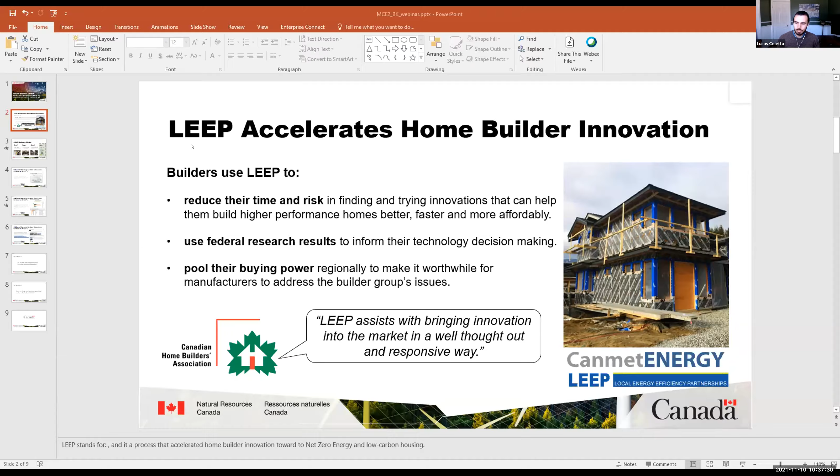And yeah, my name is Lucas Coletta. I'm here from NRCan. I work with the LEEP team, and I'm just going to take a few moments of everyone's time at the beginning of this presentation to talk a little bit about the material carbon emissions estimator that NRCan has partnered with Chris and the Builders for Climate Action to develop and to raise awareness around embodied carbon in materials that are being used in the construction industry today, and what we have to look forward to in the future.

So LEEP, as Steph mentions, stands for Local Energy Efficiency Partnership, and it is essentially a process that accelerates home builders' innovation toward net zero and low carbon projects and construction for housing. And historically, builders have been quite responsive throughout the process. I think they found a lot of value in the information that gets shared, the way networks and connections are formed, and ultimately coming out of the process with a better understanding of how to take on more energy efficient or more progressive projects in that sense.

And so builders have used LEEP to reduce both their time and risk. They've also used it to take federal research results and inform some of that decision making. And some of that is both on energy conservation measures, as well as best practices towards resiliency, durability, and what we're talking about here today, embodied carbon. And alternatively, they also pool their buying power. So regionally, builders come together and are able to identify technologies that their specific market would like to take on and adopt, and find ways of bringing that to their marketplace in a cost-effective way.

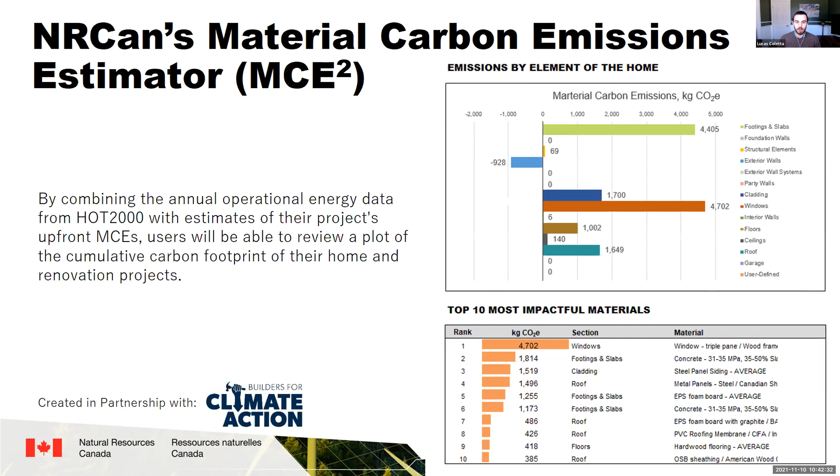So the NRCan Material Carbon Emission Estimator is going to be available in late November to early December. It'll be published on the LEEP website. And if you have any questions about that, or want to learn more about the LEEP carbon calculator, feel free to reach out to either Chris or myself or Steph, and we'd be more than happy to provide you with the information that you're looking for.

So I think with that, I'm going to wrap it up, and we have a couple of poll questions here that we'd like to get everyone's feedback on, just as we roll into this presentation from Chris. So the first one is: is low carbon desirable to home buyers?

We got a quick question in the chat while we get these results here. Is this similar to the EC3 embodied carbon calculator, or how is it different? Maybe I'll let Chris answer that. Chris, are you familiar with the EC3 calculator? Yeah, I am, and I'll address that maybe in more depth, because I'm going to go through the tool and how it works and what it's for.

But it's pulling from the same kind of pool of data, but this one is specifically designed for low-rise residential construction, and is made to model particular buildings, whereas EC3 is more of a database where you can find the source emissions for all of the materials, but it doesn't help you with the calculations to figure out what the impact of that would be for your particular building. So the MCE squared tool takes that step out and makes it easier for somebody specifically in the low-rise residential field to be able to use that information.

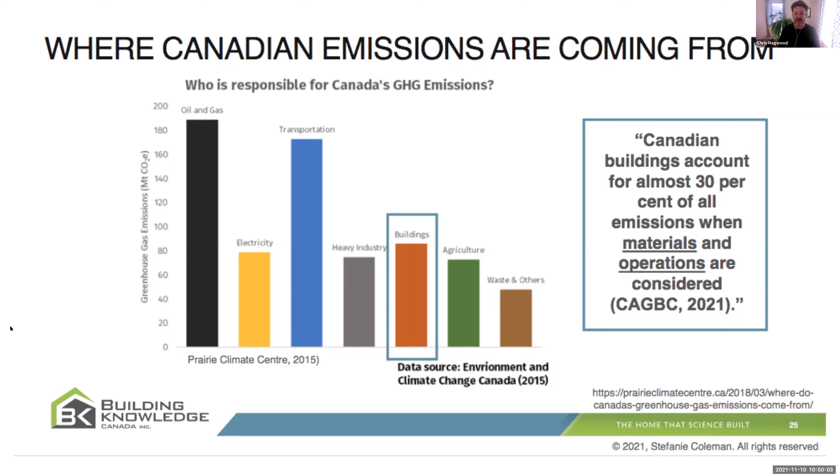So anybody who was at the previous session that Steph presented at has seen this graph, or you might have seen something like this somewhere. This is specifically for Canada, but buildings represent about 30% of emissions. And we want to make sure that we're not just counting operational emissions in that take, but that we're figuring out where building materials show up in lots of these other categories.

So obviously, it's fairly easy to measure both energy use and then emissions from operating buildings. But the manufacturing of the materials is buried in a lot of these other categories. Some of the oil and gas that's extracted is for building materials. The electricity is used for that. Transportation is used for building materials. And that heavy industry bar includes the manufacturing of a lot of materials.

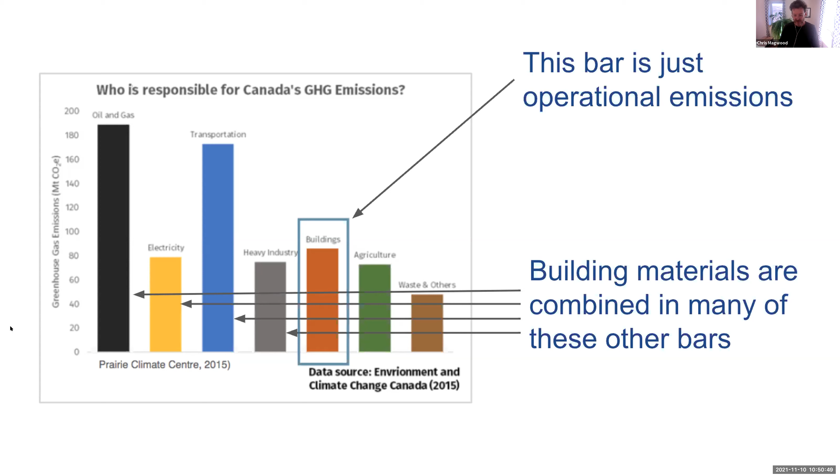So we're thinking now more about the full life cycle of our buildings, and that's where this whole notion of embodied carbon as distinct from operational carbon comes in. And you may have seen various versions of this life cycle graph where something starts as raw material, gets transported to a factory, is made at the factory, gets transported to a job site, is put into a building. That's the upfront embodied carbon. So those parts of the life cycle involved in making the building.

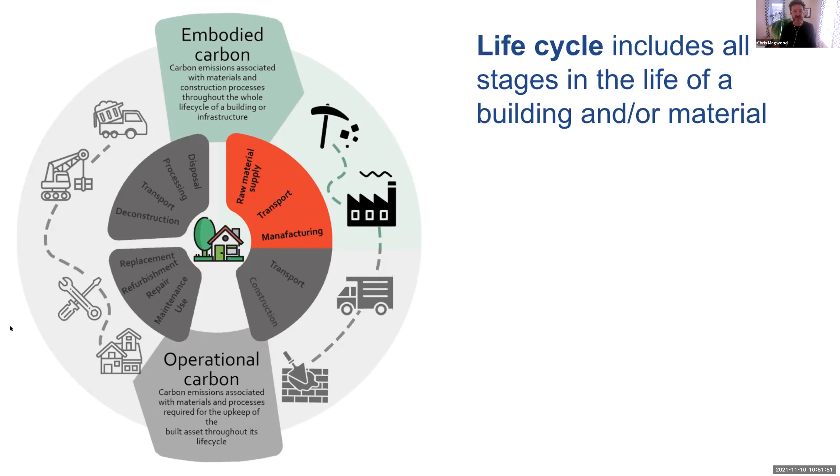Then while the building is in existence, there's the operational carbon that most of us in the building industry have been focused on for quite a while now. And then there are further life cycle impacts from those materials in those buildings in terms of maintenance and refurbishment and repair, and then finally the end of life of a building or the products within the building.

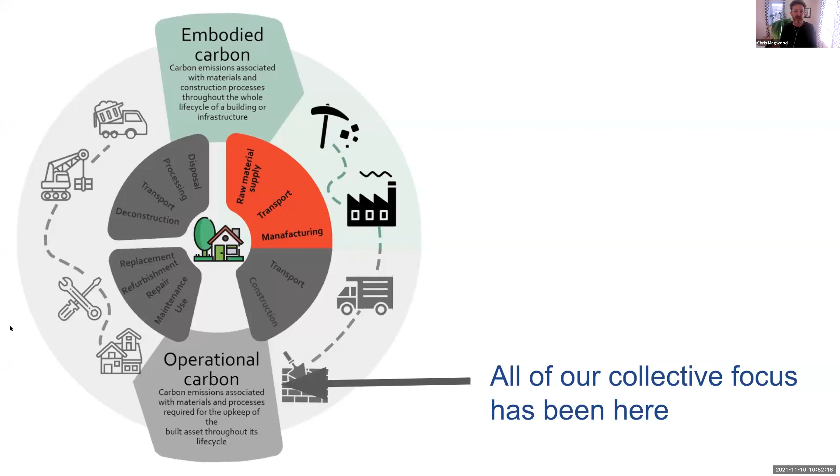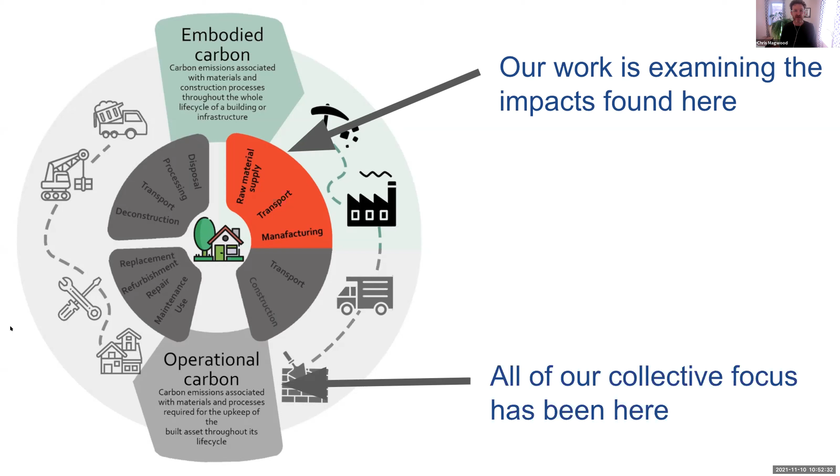So most of the people who are attending today are probably very aware of the operational carbon piece, and we've all been putting a lot of great effort into reducing that, both by making buildings more airtight, more insulated, improving mechanical systems, and looking at the types of fuels we're using for those buildings. But the work that I'm going to talk about today is looking at the impacts found in this upfront piece, and in particular, the chunk that's highlighted in red, which is the product phase of actually manufacturing the materials.

And the reason the focus is there is because this is where the highest chunk of material life cycle impacts happen, in this product phase. In life cycle assessment, we call these phases A1 to A3 for raw material supply, transport, and manufacture, more colloquially known as cradle to gate. And the reason for focusing here is this is where the bulk of these emissions do happen.

So 70 to 85% of a material's impact is going to be here, but also because the most reliable data on those emissions lives here, because we can go to manufacturers who understand their whole supply chain up to the point where the product leaves their gate.

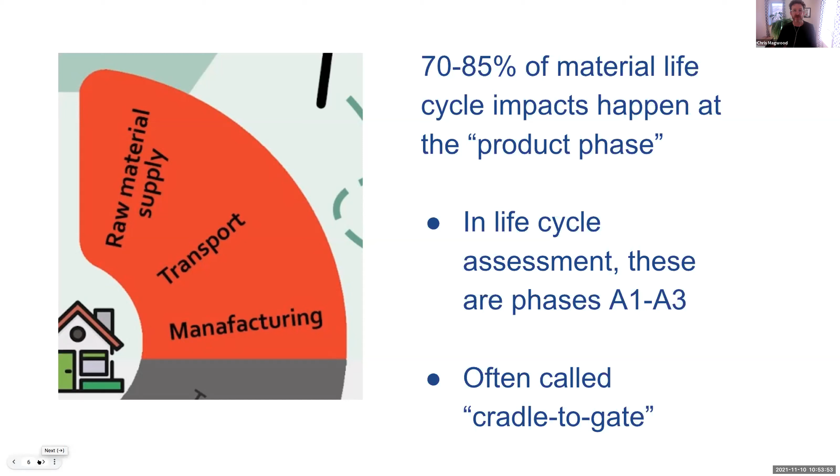Those are quite easy to quantify, whereas when we get into transportation to site and construction impacts, those can vary really widely. Not that they're not important, but they are a much smaller piece of the overall pie, and they vary depending on each person and each building. So we have chosen for this work to really focus on this cradle to gate phase.

And we get all the information about that cradle to gate phase from reports called environmental product declarations, or EPDs. And I apologize, as we get into this, like any subject matter, the carbon emissions world is full of acronyms, and I'll try to spell them out and not use them without explaining them first. So an environmental product declaration is a report on the impacts of different types of products.

These EPDs exist for all kinds of products, not just building materials, but for building materials, there are particular categories. So flooring is looked at through a different set of product category rules than insulation or concrete, or like materials are treated in similar ways. But this International Standards Organization standard says what you count and what you don't count and how you go about counting it. And then they're either made by or verified by a third party beyond the manufacturer themselves.

One of the pieces of information that an EPD gives us is the global warming potential of that material. So that's a figure that says for a certain quantity of that material, a certain amount of emissions go into the atmosphere. And those emissions are all put in terms of carbon dioxide. So there might have been fluorocarbons emitted, methane emitted, CO2 emitted, but the GWP number is given so that all of those emissions are in what's called carbon dioxide equivalent.

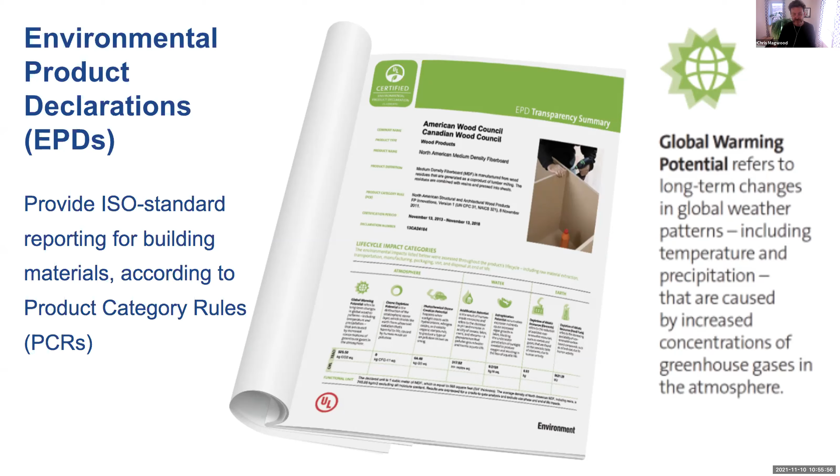It's also important to know that there are two kinds of EPDs out there. Some are industry-wide, so you will have an industry organization that gathers information from all or some representation of its membership, so that what you're seeing is an average for the emissions that come from a certain product from a wide range of manufacturers. And then you have manufacturer-specific or even product-specific EPDs where it's one particular company's emissions that you're seeing in their EPD.

And it's important to be able to distinguish between these because an industry-wide EPD is going to give you a number that is a reliable average, but the number you're using for your building may not be accurate to your location. So for example, the same factory making a material using a lot of electricity in a region where the grid is mostly supplied by coal will have a much higher climate impact than the exact same manufacturing process using the same amount of energy, if that electricity is coming, say, from all renewables.

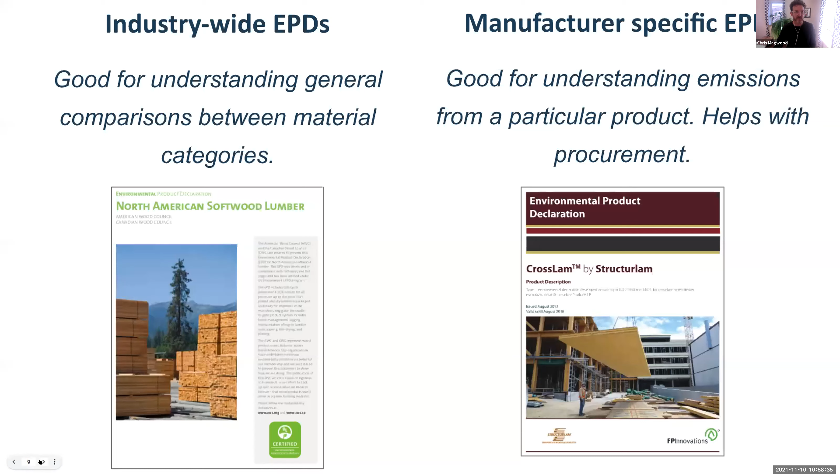So methane is equivalent to 34 tons of carbon dioxide, or a ton of nitrous oxide is 298 tons of carbon dioxide. So we put all of that together in EPD language, and we talk about material emissions as kilograms of carbon dioxide equivalent, so that we have one metric that we're able to use, even if all the emissions aren't carbon dioxide.

So the quick and easy explanation of how you take all of that EPD information and figure out the carbon footprint of the materials for your specific building would be, you find all of the EPDs for the products that you're going to use in the building. You do your own material quantity takeoff, and then you multiply your material quantity by the global warming potential per quantity in the EPD, and that will give you the carbon footprint of a particular material.

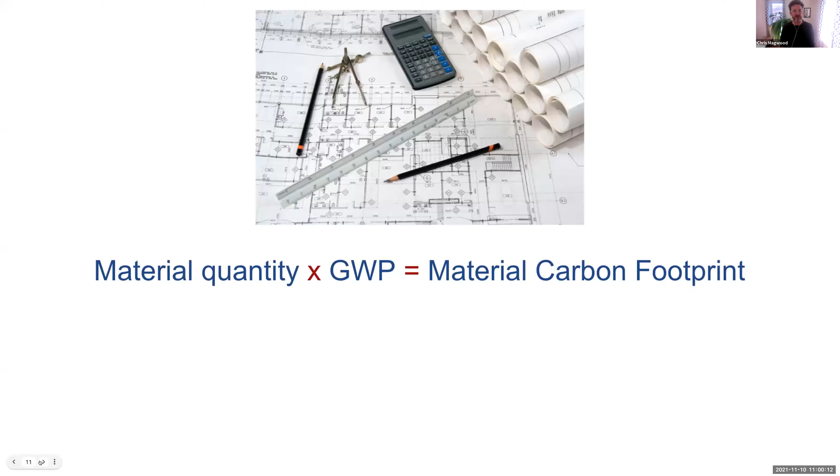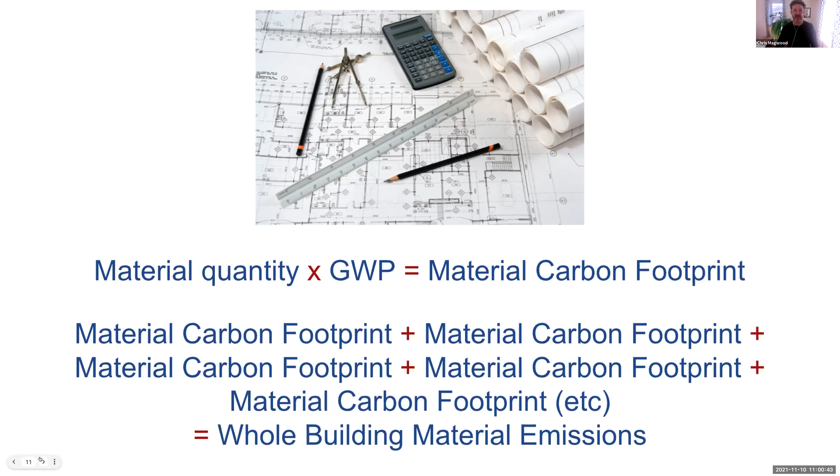And then you do that for each material, and you add them all up, and you'll get your whole building material emissions. So to do that on a building by building basis, it takes a lot of work. The first time I calculated a building, it took me about 1.5 years to find all the EPDs and to do all the background calculations. So clearly that was a longhand way of being able to understand the material impacts for one building.

So before I go on to the tool that we've developed to do that for you, I wanted to just pause and take any questions that have come up from that background explanation before we wade any deeper. So I'm just looking here, and it doesn't look like there are any questions on that part yet. But are you going to be talking about what components of a home have EPDs versus ones that don't have EPDs, or how you deal with all of that? Yep, that's coming next. Perfect. Okay, so actually a question did just pop in.

It says, how much does it cost for a manufacturer to get an EPD? Do you have any information on that? A little bit. That's not something that I do, but from talking to manufacturers, I've heard that it's anywhere from $10,000 to $40,000, depending on the extent of the operations, how much data is already known, how long the supply chain is. There's a lot of factors that go into it, but the numbers I've heard are in that range.

Actually, I'll add on to that question. Do you have an idea of how long it takes for a company to go through that process? And then there was a further comment asking, how do we convince people that it's worthwhile to actually do the EPDs? Right. I will take the second question first and say that I think just reaching out to manufacturers and requesting it is really important. They often don't have any sense of how important this is to their customers, but most companies are pretty sensitive to customer requests.

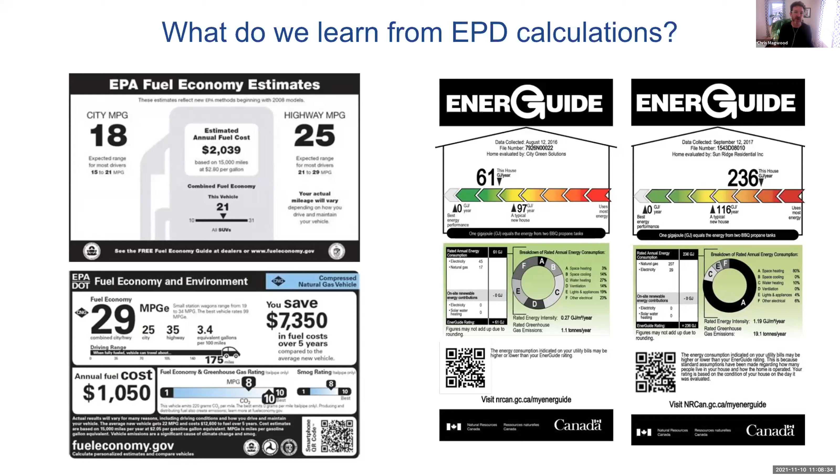And I would also say, when we get into the tool that I'm going to show you, think of it a lot like energy modeling software. When you see an EnerGuide score that says this house is going to use 61 gigajoules and this one's going to use 236, if you check the energy bill of that house, it's probably not exactly 61 or 236. But if you use the software and the parameters, and you started with a high number and then improve the windows, the insulation and the air tightness, you're going to get a better number. So these are great for comparisons, but they're not exact predictions of the exact amount of emissions. And that's why we use the term estimator with the tool.

So one last thing that I want to address before we get into the tool, because I think the emission side that we've talked about so far, where you sort of count emissions and the number goes up as you add materials, makes sense. But there are a range of materials within these estimator tools that show negative numbers. And so what I want to do is just be clear on what the negative numbers mean and how that works. And currently in the tool right now, the only materials that have negative numbers are plant-based materials.

There are ways that people can draw carbon dioxide out of the atmosphere and mineralize it, but none of those are commercially available right now. But the way this works for plant-based materials is that every plant grows through photosynthesis. So it's literally pulling CO2 out of the atmosphere to grow. It keeps the carbon atoms from that CO2 within the plant structure, and it lets the oxygen go. And so the plant has done the thing that the IPCC says we need to do, which is pull carbon dioxide out of the atmosphere.

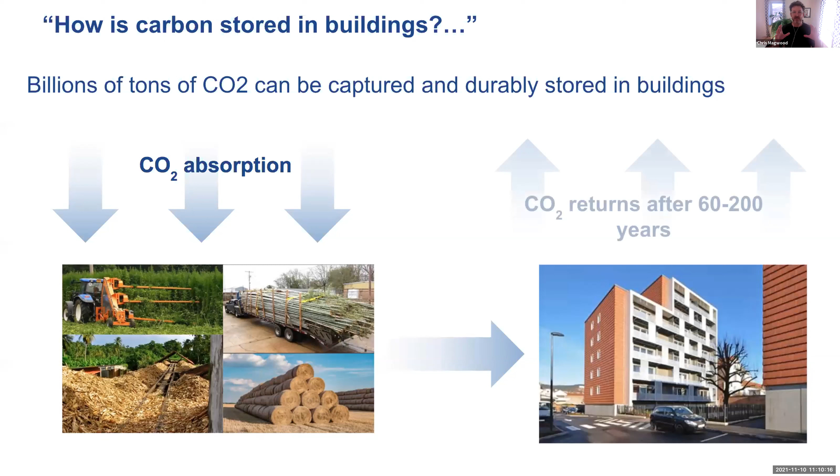But on a regular cycle, plants pull CO2 out of the atmosphere. The plants are then either eaten or burned or rot, and that carbon goes back to the atmosphere as CO2. When we make a building material out of those plants, what we do is interrupt that cycle, and we put it in a building for however long a building might last. One would hope at least 60 years. One would try really hard to make buildings last hundreds of years. But for whatever length of time, that carbon that was just in the atmosphere is now stored in the building. It's not back in the atmosphere driving more climate change.

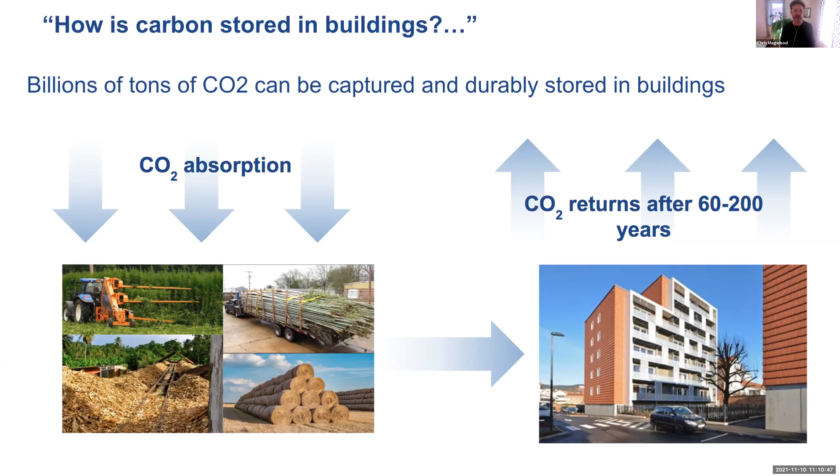And so the amount of carbon held in that plant, expressed as an amount of carbon dioxide, makes for negative numbers for some plant-based materials in these estimations. So some people might have seen results like this from some of the early studies I did, where certain buildings have positive number emissions and some have negative number emissions, and that's literally if you are using more of the plant-based materials, you can overall effect a net negative impact on the climate.

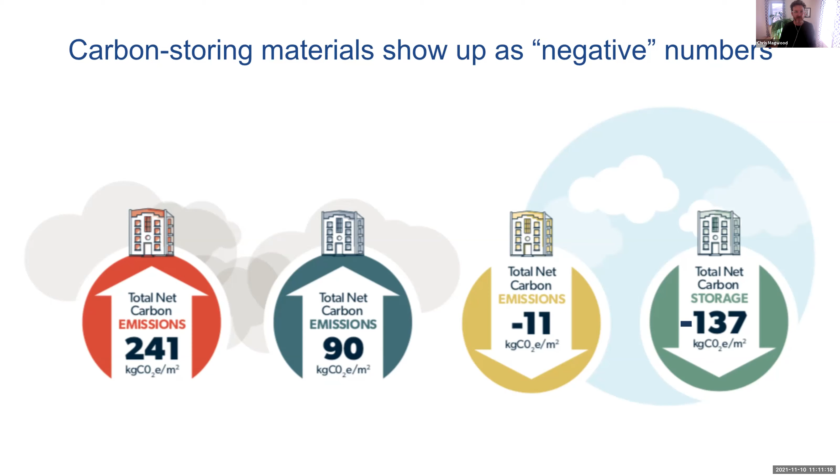Now, the tools right now don't include any amount of carbon storage or sequestration from wood or timber related products. And that's because the climate accounting for timber products is a lot more complicated than for either agricultural residues or other waste stream fibers or even purpose grown crops for building. Because anything that's an annual crop that's grown, we understand what that land is already being used for. It's being used to grow food, or maybe it's being used to just grow building materials. But it's going to continue to be used for that for some length of time. And we know that the carbon dioxide drawn down one year is going to be approximately equaled the next year as that land continues to be used.

Forests are a whole different beast, where the entire forest ecosystem is a really important carbon stock for the whole globe. And the work that we do to pull trees out of there can either help that forest carbon stock get bigger, in which case we are doing something good for the climate, or it could make the forest grow smaller and the carbon stocks in the forest grow smaller. And so simply transferring a bunch of carbon atoms from a forest to a building isn't necessarily good for the climate. It could be good for the climate or bad for the climate. And right now we just don't have the tools or knowledge or data to know when that's happening.

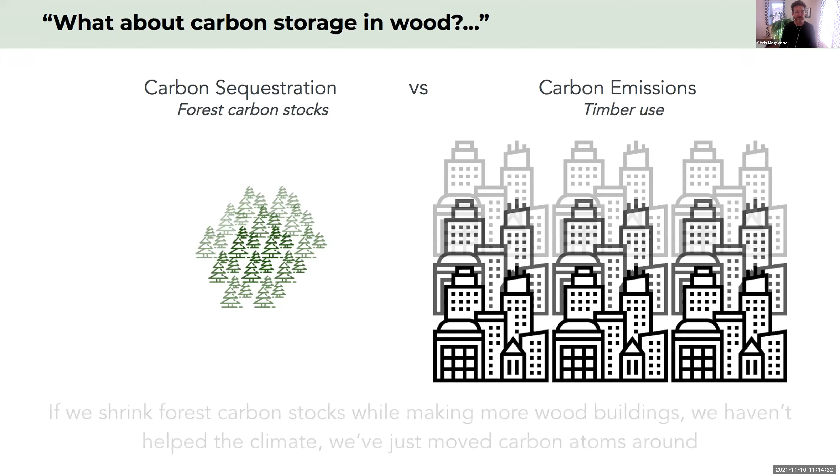Okay, quick pause here, because sometimes that can trip people up, the notion of negative emissions. So I just want to make sure that people feel clear about that. Thank you, Chris. So there are some questions, some from the last segment, and I'll ask those.

Do the EPDs report on environmental impacts other than greenhouse gas emissions? Yes, they do 7 categories of impacts. So they also look at eutrophication, acidification, fossil fuel use. So there are 7 in total. So the global warming potential is just one of the 7 impacts that they record.

Thank you. The next question is, do you know if similar work is being done on embodied carbon for the infrastructure industry? And specifically, they're asking about the electricity transmission and distribution industry. Well, that cracks the lid on a big can of worms. So the easy answer is no, not really. And a lot of this gets into the whole notion of boundaries. Where do you say we're going to start counting related emissions, and where are you not?

So, currently, when you look at energy supply, we're just looking at the direct emissions from that energy, but we're not looking at what it took to make the wires or the pipelines or the pumps or any of that stuff that delivers it. We're also not looking at the shipping involved. When a tanker truck of gasoline goes from one place to a gas station, none of that is counted. So in infrastructure right now, there's a lot of work being done on trying to identify what we should be including. But currently, no, we're not looking at it through a wider lens like that.

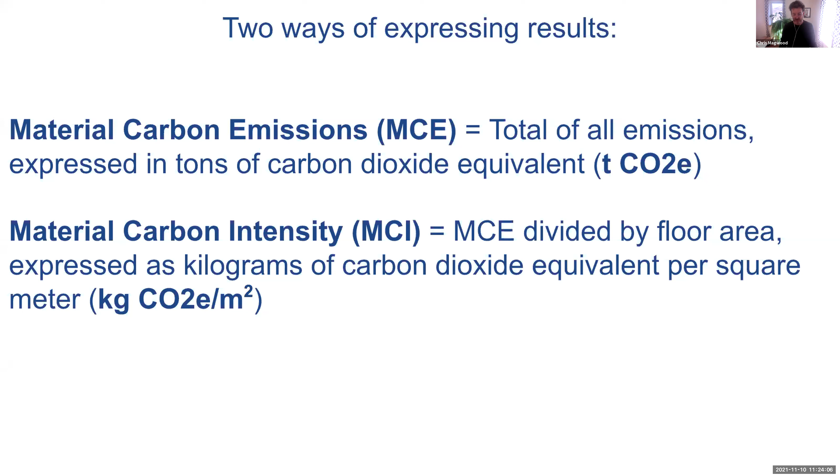Oops. Okay, so now we'll get on to the tool. So MCE squared is a spreadsheet-based tool that has a back end with all the available EPDs for residential construction embedded in it. It is linked to HOT 2000. So you can see the big green button here, which will import HOT 2000 data.

So what you'll get out of your HOT 2000 file are these energy consumption numbers, which will calculate out operational emissions. And then some of the building geometry will come through too. So anything about the size of the building that HOT is able to export, that will happen too. And so you can build a model here in the same way that you do in HOT or other building modeling softwares.

So within the estimator tool, we sort of give these handful of not warnings, but explanations about what it is that you're seeing in the tool. And the first is that we've gone to every length we can to find every available EPD for building materials, but they come out all the time, so there might be new ones that aren't in there.

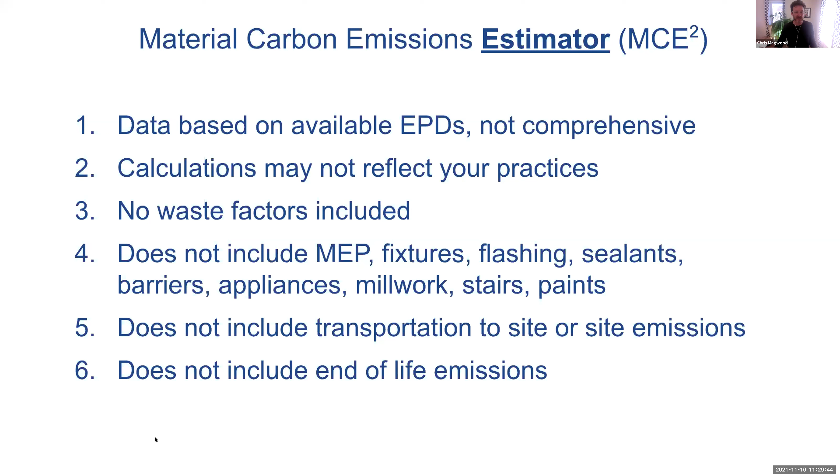So knowing all of that and going into the tool, the way it works, I've kind of taken these snapshots from along the bottom of the spreadsheet, but it begins with a user input sheet where you define the building. If you have a HOT2000 model, a lot of that information will come across from HOT2000, but otherwise we're asking you mostly for gross building dimensions, area of exterior wall, area of interior wall, floor area, roof area, window area, things like that.

We tried to really minimize the number of inputs required. And then basically it's organized by building assembly, and each one has its own tab within the tool. So after you've done the user input, you would move to footings and slabs. You'd get to the footings and slabs page, and it'll have concrete options and pier options and wood foundation options and insulation options, and sort of all the components that you would use to make footings and slabs.

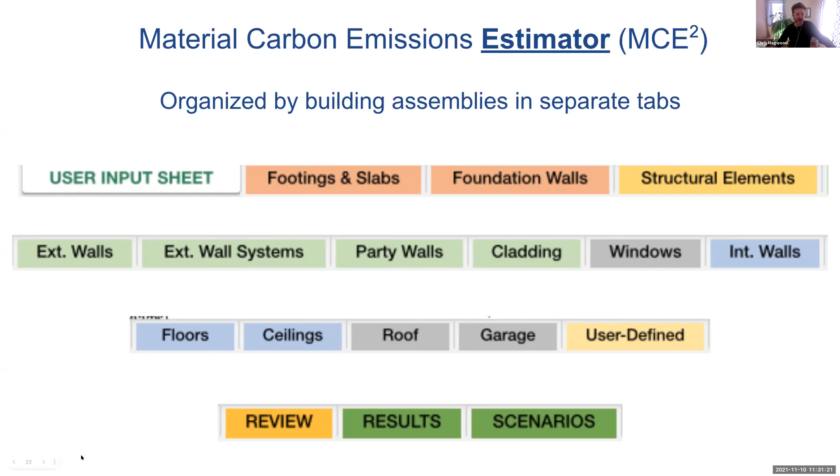And again, foundation walls, the heavy structural elements like posts and beams, exterior walls, or we included a section for exterior wall systems for things like SIPs and ICFs, party walls, cladding, windows, etc. You basically go through the tabs and build the building. And at the end, there's a page that shows you all the materials you've chosen, so you can do a quick review and make sure that you've captured everything. And then a results page and a page that allows you to run multiple scenarios on the same building. So those are the tab options.

And then what comes next here. So this is a look at a part of the exterior walls tab. Exterior walls would include framing, sheathing, those sorts of things. This is the cavity insulation section. It's just part of it. I chose this one because for some of these materials, there's an additional input. So for framing, you would give us your framing spacing. For insulation, you're giving us your R value. For things like concrete walls, you're giving us the thickness of the concrete. So you make those choices.

And then for each category, so here's cavity insulation, you get to see both the average. So in lighter blue here, all the fiberglass batt options that we have are averaged out. And if there are manufacturer-specific ones, then we'll call them out, and you can see brand by brand how they compare. But the thing that I think is really great about the tool is that, because I've already put in the size of my exterior walls, in this case 127.6 square meters, I can already see the carbon footprint of all these different material options before I start making my selections.

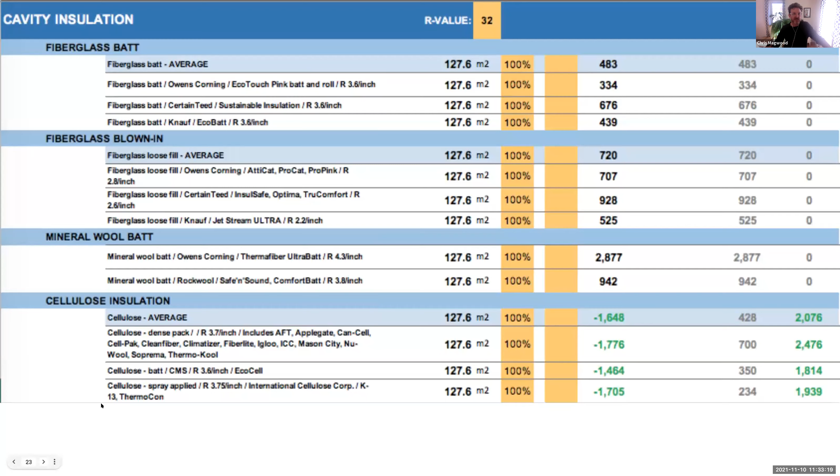And I think this is the key to making this tool really useful, is that either between different material types or even within a specific material by brands, I can say, oh, look, the carbon footprint of fiberglass batt is actually lower than fiberglass blown in, or I could choose this manufacturer over that manufacturer, or, oh, look, cellulose has this big negative carbon footprint because it stores more carbon than was emitted in making it. So right away you get to see what all the results would look like, and then you can start making your choices. This is the continuation of that cavity insulation section. It's one of the places where there are a lot of options.

So you can see that the range is really wide, for this building, from 9,000 kilograms of emissions if I use HFC spray foam, to potential storage of 5,000 kilograms if I use straw bale, and basically everything in between. So the idea is the tool will really help you understand the impacts of different material types, and get you to hone your design in on the things that, A, meet your carbon footprint goals, but B, also meet all the other requirements of your building.

And by no means is this tool intended to be any kind of building guide. It's really just the carbon footprint of the materials. You need to know: can you get it? Is it affordable? Is it appropriate? Are there building science issues? All of that stuff is left to the very smart designers and builders in the room. But we want to be able to give people that really critical piece of advice around the carbon footprint.

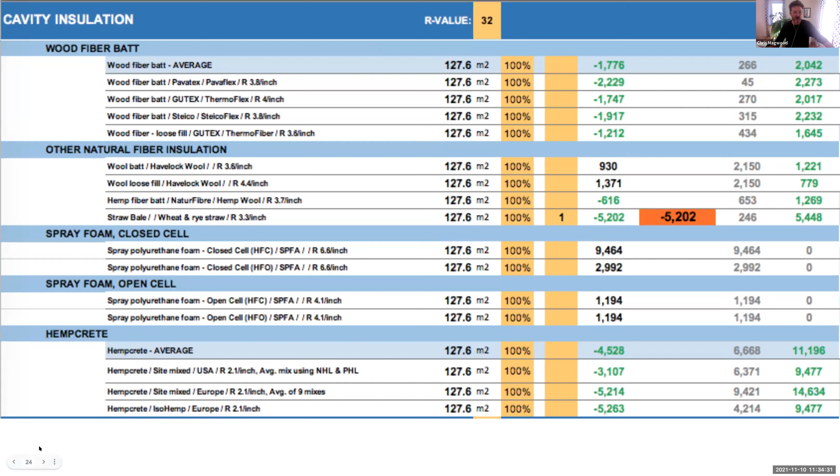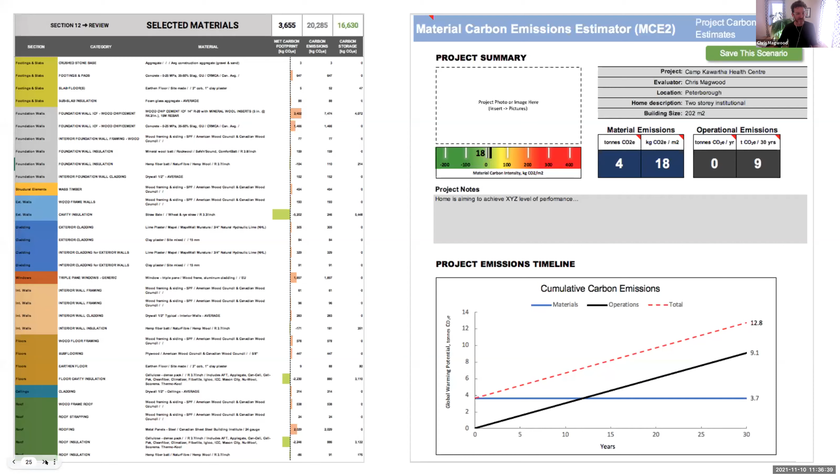So I'll pause there because I'm guessing that there probably are some questions about the tool. There will be more instructions and more training available on the tool when it's released. But that was a high level overview of what it looks like, what the inputs are, and what kind of information you'll get out of it. Yeah, exactly. And it's great. It's giving some really useful information, and it's designed in a way that takes something that could be really complicated and makes it much more manageable.

That's what happens when a builder builds some software. It ends up working well for builders. That's the trick. I needed it to work for me first, and so it turns out that it seems to work for a lot of people because I was really applying a builder's lens to it. Oh, that's perfect. Well, it makes it very practical. Exactly. So now we're gonna have a big influx of builders moving into software development. That's right. Probably not a bad idea. Don't do it is something that I would say. Free advice. That's funny.

Okay, so a couple of questions did come in. So the first one is, the kilograms of CO2 values here are different from the EPD values. Are these total values for the quantity used in the building? So I think maybe there's just some clarification on what was shown in the EPD versus the numbers shown in the tool. Yeah, so this is the reason why EPDs can be hard to work with. Especially in the insulation category, one EPD might tell you that a kilogram of this insulation has 10 kilograms of emissions associated with it. And this other one will tell you that a square meter at RSI 1 has a particular amount, and another one might give it to you in meters cubed.

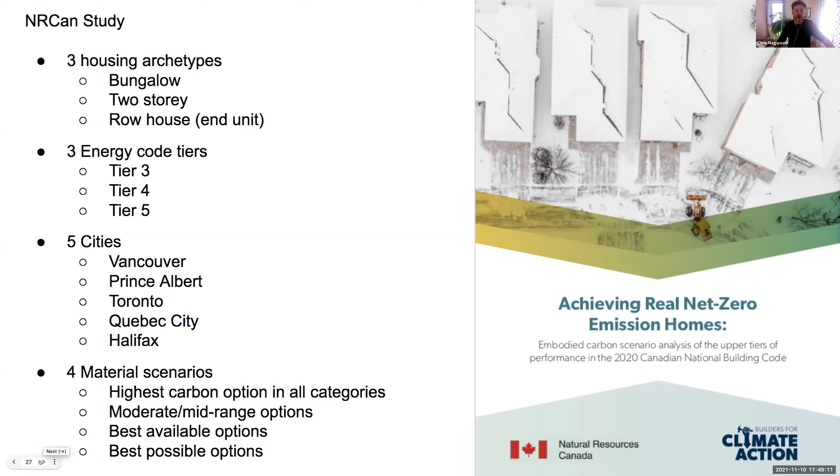And then we applied 4 material scenarios to those buildings. So this is the first comprehensive national data set of model buildings, and the results were really interesting. I'm going to go quickly here because everybody knows the energy story, that a tier 3 building on gas has fairly high operational emissions. If you move it up to tier 4, it goes down.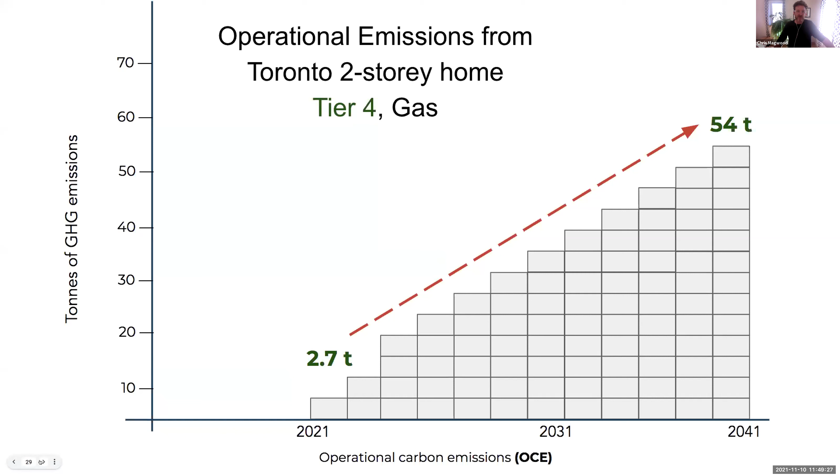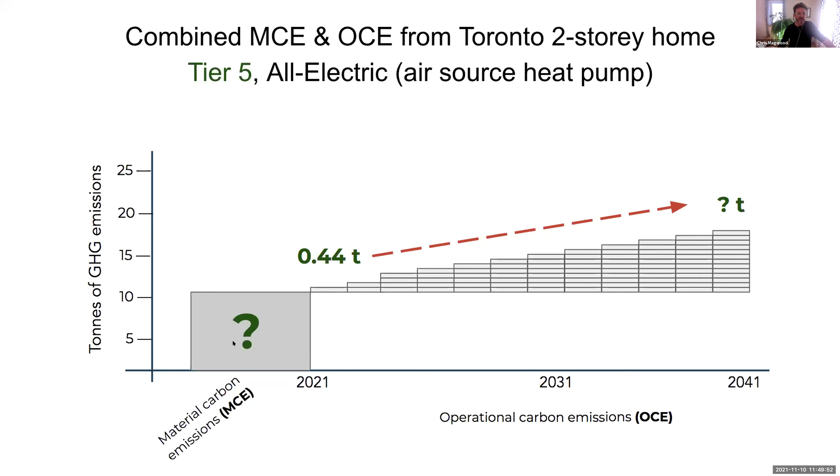If you make it all electric, at least in Ontario, and keep it at tier 4, it goes down even more. If you make it a tier 5 all electric building, you've come close to getting the operating emissions extremely low. And so this NRCan study was to figure out, this is only on operations. What is this upfront piece, and what does it look like? I'll show you quickly. So this is for a 2-story home, the 2-story NRCan archetype.

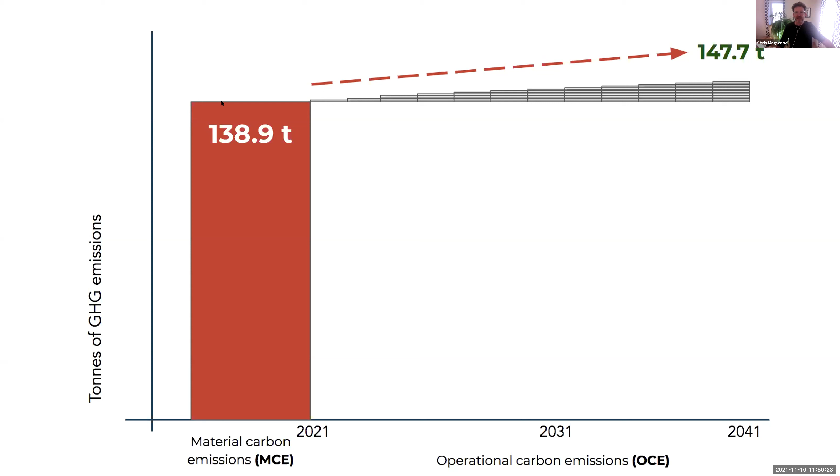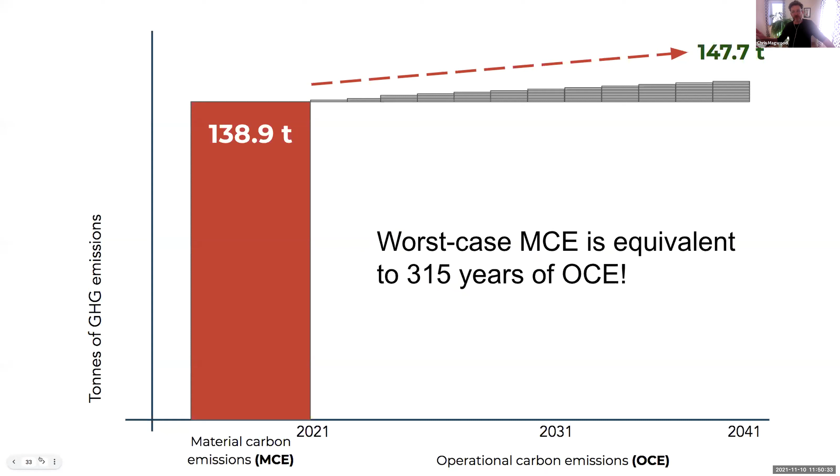The worst emitting version that we made in the study had almost 140 tons of emissions associated with the materials. So if you got that building down to a really low carbon footprint on the operational side, you can see that the materials represent the vast majority of that building's emissions in the decades coming up. And in fact, it'll take 315 years of operating that building before the operational emissions have equaled these upfront material emissions.

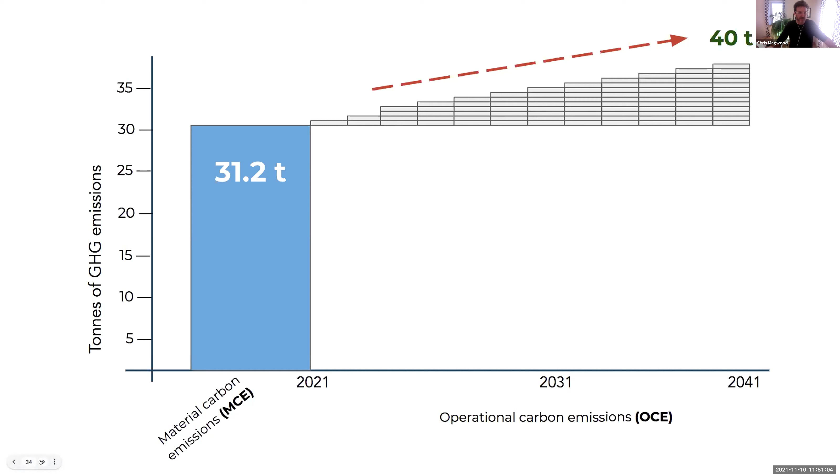The next model we did was sort of a more moderate version. It ended up having just over 30 tons of emissions associated with the materials. I would say this is somewhat representative of most home typologies in Canada. But again, the lion's share of the emissions over the next 20 years anyway belong to the materials. It'll take 71 years for this building to have its operational emissions equal this upfront carbon footprint.

The next model was super interesting because here we used materials that were widely available and code compliant, largely things like cellulose insulation. And this building ended up with a net carbon storing footprint of just around 20 tons. So you can build and operate this building, and in 20 years, it'll still be a net store of carbon.

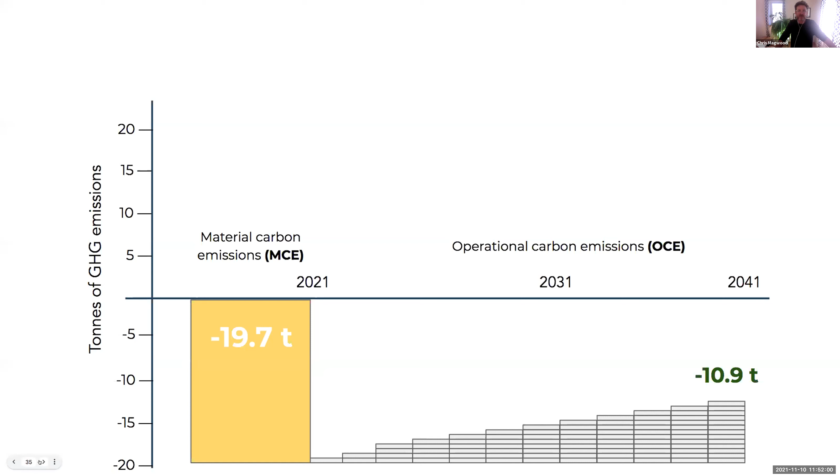And as governments push to get to zero emissions by 2030, 2040, 2050, whatever the target happens to be, this suddenly starts saying, oh, the home building industry could do that. We could actually make carbon storing buildings whose operations are low enough that the building remains a net store of carbon for a number of decades. So 45 years, this building would stay net carbon storing.

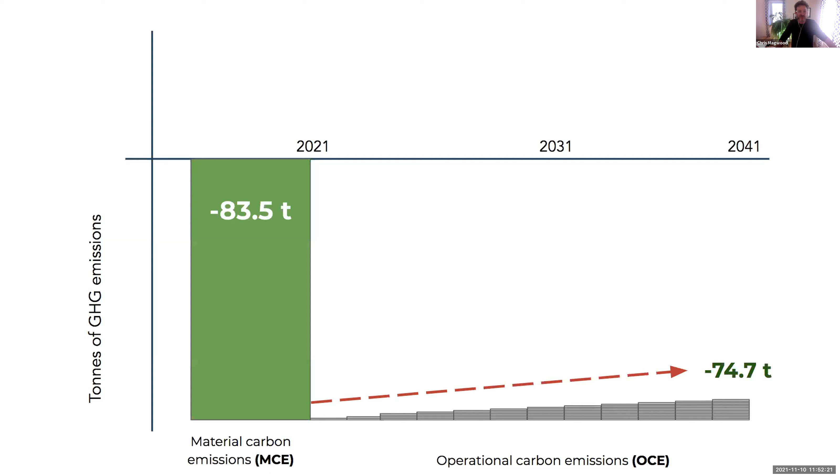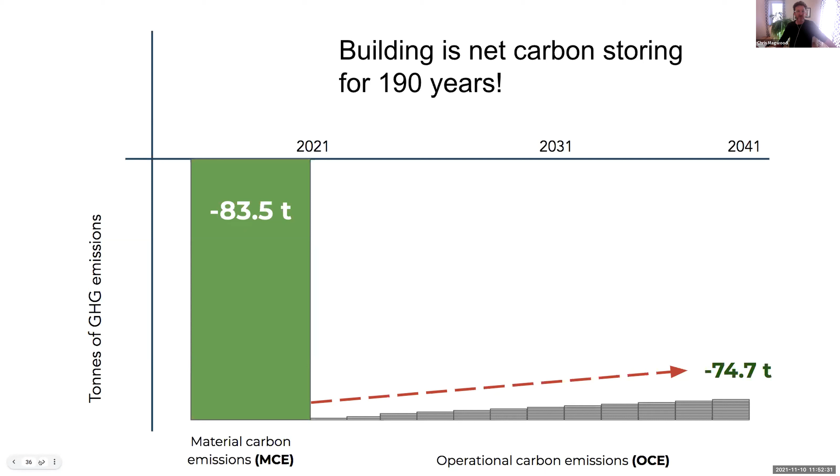And then we kind of did a best case scenario. What if you use the best materials for carbon storage? They're not necessarily common, they're not necessarily code compliant, but we know that you could use them. And here you're able to store over 80 tons. And now this building is net carbon storing for pretty close to 200 years. So that gives you a range from these model buildings.

We're also doing some studies of as-built homes. So this was our NRCan results for a Toronto 2-story home. The worst case was 138 tons. The moderate case was 31 tons. And the best conventional case was storing 20 tons. We're just getting towards the end of a study of 100 different homes that have been built in the last few years in the GTHA.

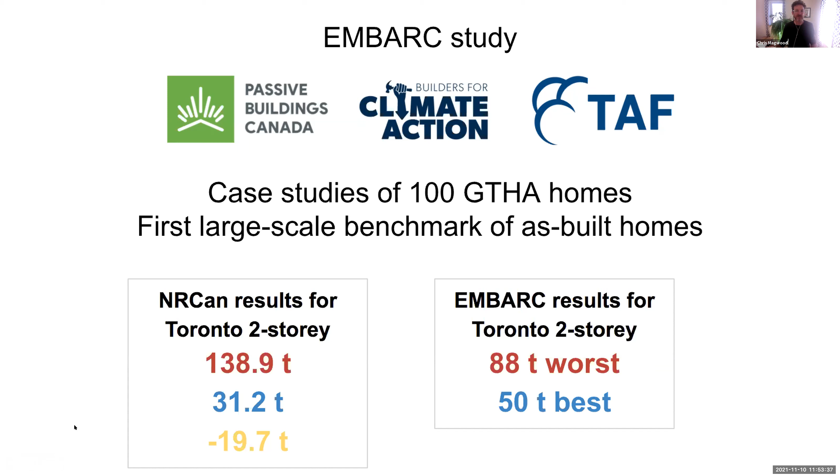And what we're finding so far is that for 2-story detached homes, 88 tons is the worst result, but 50 is the best. So what we're seeing is that compared to the modeling that we did for NRCan, the real life picture fits right in the middle. The worst aren't as bad as we might predict, but the best are nowhere near as good as we would predict. That study will be coming out in the early part of next year, and we really hope it will help show people what the emissions profile looks like of real as-built homes in this part of the world.

And just quickly, I'm glad somebody asked the question about the other impact categories in EPDs, because I did a look where I said, let's look at the lowest carbon footprint material in every category, and then look at the other categories in EPDs. And what I realized is that the lowest carbon footprint also scored the best in all the other categories. So a lot of these materials carry with them less toxicity, improved occupant health and safety, lower waste, and they can also be sourced and made locally.

I'm very cognizant as a designer and builder myself of not wanting this single lens where I make choices based on one metric, and meanwhile really wreck things in other ways. So, in applying that lens here, what I found was, if I was choosing materials for a low carbon footprint, I was also choosing materials that lowered impacts in lots of other ways.

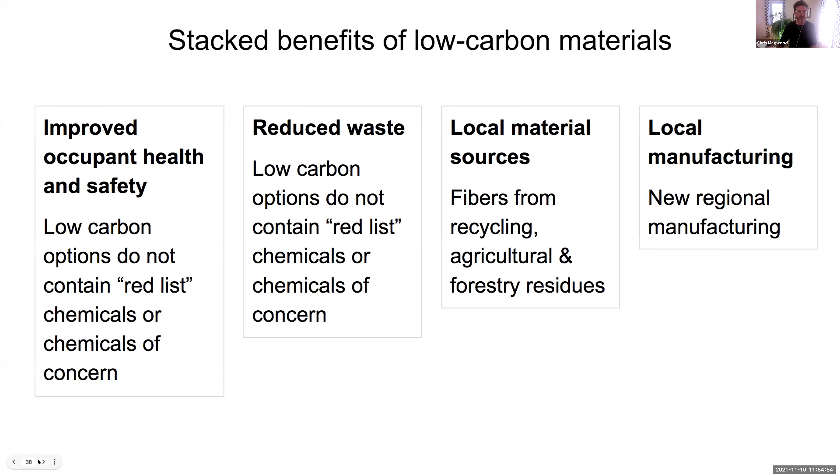And there, I think I ran that part fast, and so we have a few more questions. I hope that wasn't too fast, but I just wanted to give people a sense of what those numbers mean.

And I think what's really interesting is the crazy range of results that you can get, because that modeling is of the exact same building. It's the same size, shape, R values, performance level, floor area. Like, it's literally the same set of plans, just with different materials thrown at it.

So the fact that you can make a building that has either hundreds of tons of emissions associated with it, or 20 tons of storage associated with it, or anywhere in between, it sort of points to the fact that, as a community, there's a lot we can do to really drive to lower emission buildings.

So that is great. And I'm really excited that our next session next week, you're going to dig into this report and talk about case studies as well, so we can expand on that. So thank you very much, Chris.

Yeah, we've got a handful of questions here. So what we'll do is we'll start at the top. So how do you treat windows? They said, I can imagine finding numbers for glass, but frame materials vary widely. And does it matter percentage wise with respect to siding, insulation, et cetera?

Yeah, so practically speaking, the user of the tool defines the exterior wall area minus windows, and then says how much window area. So those two things are tracked separately. There are not a lot of EPDs for windows from window manufacturers right now. So this is the only place in the tool that we've done this. But for the window section, we took EPDs for window glass, and EPDs for different types of frame materials, and put them together to make our own figures.